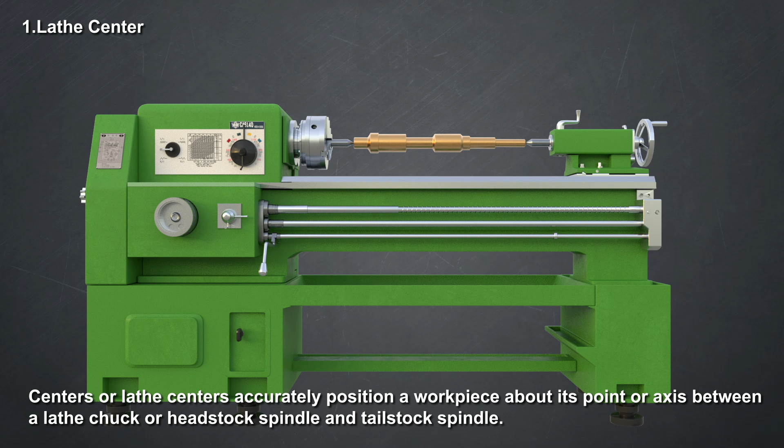Lathe center. Centers or lathe centers accurately position a workpiece about its point or axis between a lathe chuck or headstock spindle and tailstock spindle. This enables the workpiece to rotate or revolve and helps ensure concentric work.

The work turned is parallel throughout, but it requires great skill to perform operations, especially knurling, thread cutting, and undercutting. It is limited to external operations only.

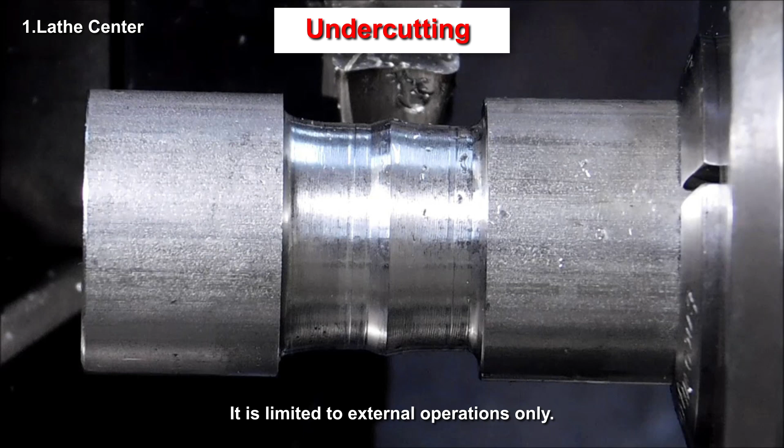Procedure to support work using lathe center. Now let's see how the lathe center supports work. The work needs the following preparations to be carried out before the actual operations are performed.

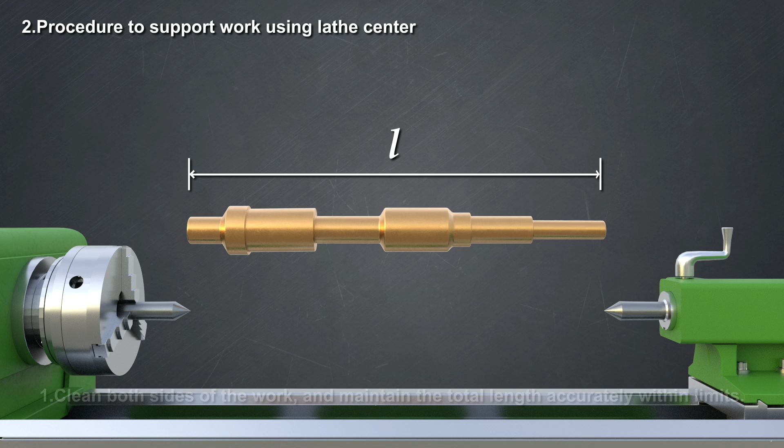1. Clean both sides of the work and maintain the total length accurately within limits. 2. Choose the correct size and type of center drill and do center drilling at both ends. 3. Dismantle the chuck from the spindle nose and assemble the driving plate or catch plate.

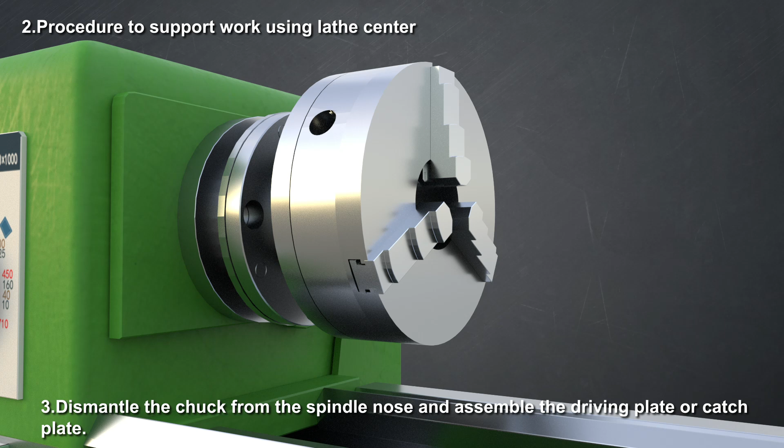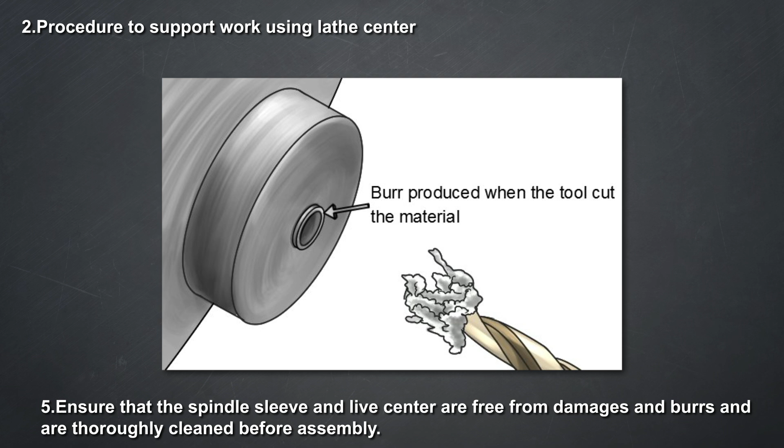4. Assemble the spindle sleeve to the spindle nose and fix the live center to the sleeve. 5. Ensure that the spindle sleeve and live center are free from damages and burrs and are thoroughly cleaned before assembly. 6. Check for the true running of the live center.

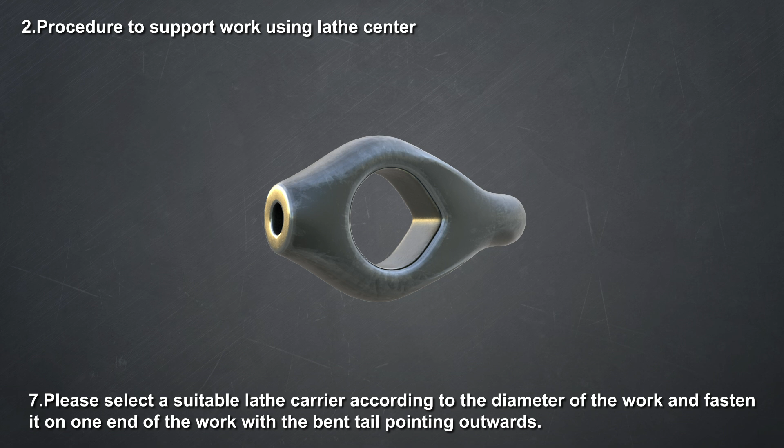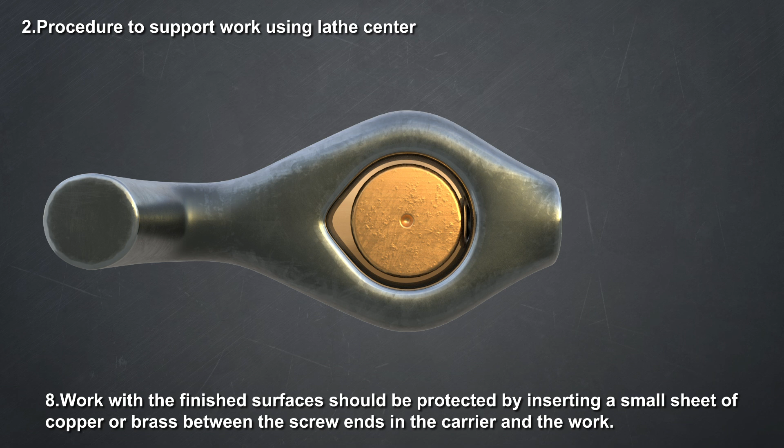7. Select a suitable lathe carrier according to the diameter of the work and fasten it on one end of the work with the bent tail pointing outwards. 8. Work with finished surfaces should be protected by inserting a small sheet of copper or brass between the screw ends in the carrier and the work.

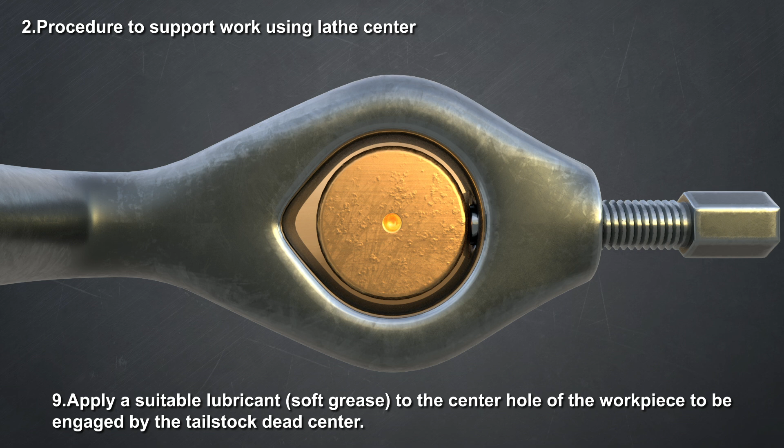9. Apply a suitable lubricant, soft grease, to the center hole of the workpiece to be engaged by the tailstock dead center. 10. Move the tailstock to a position on the bed to suit the length of the workpiece. The tailstock spindle should extend approximately 60 to 100 mm beyond the tailstock.

11. Ensure sufficient space for the saddle to operate before clamping the tailstock to the bed. 12. Clamp the tailstock in position by tightening the tailstock clamp nut.

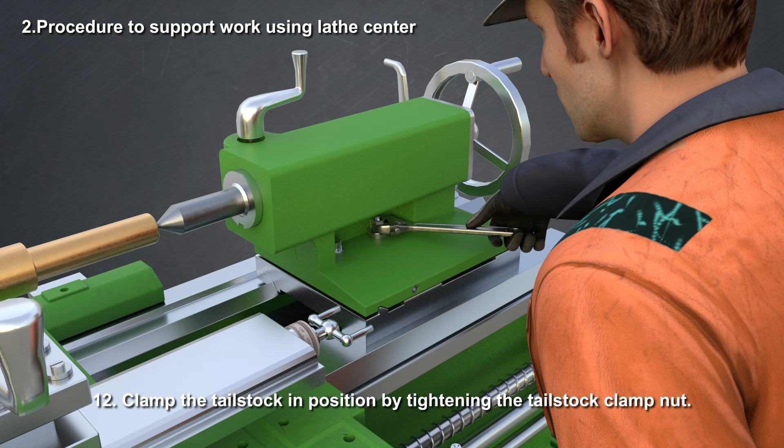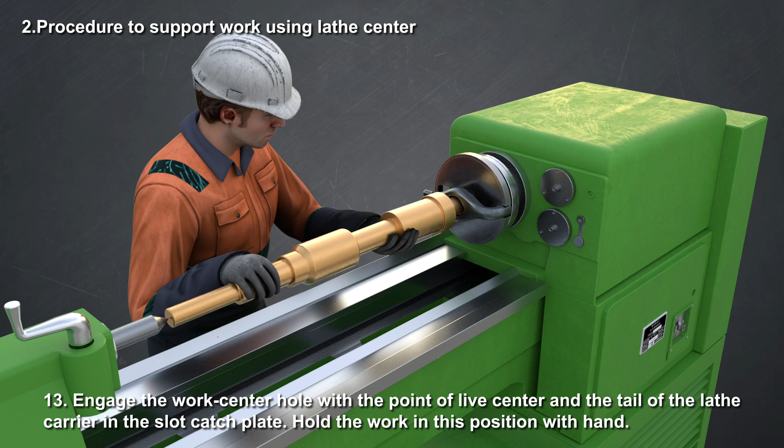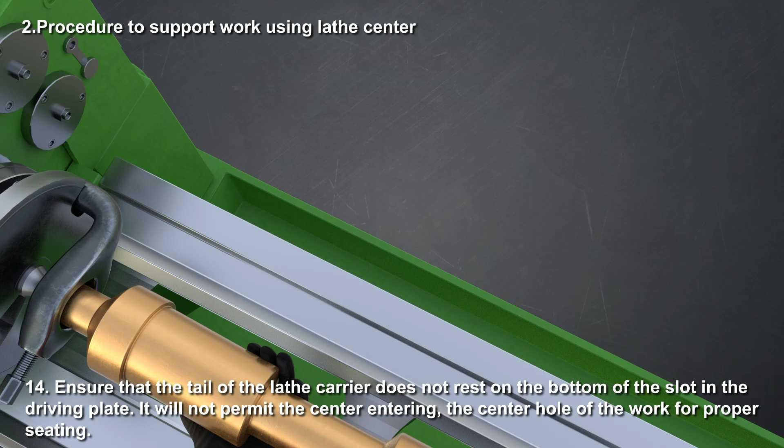13. Engage the work center hole with the point of the live center and the tail of the lathe carrier in the slot catch plate. Hold the work in this position with hand. 14. Ensure that the tail of the lathe carrier does not rest on the bottom of the slot in the driving plate. It will not permit the center entering the center hole of the work for proper seating.

15. Advance the tailstock spindle by the hand wheel rotation until the point of the dead center enters the center hole of the work with proper seating, eliminating all endwise movement.

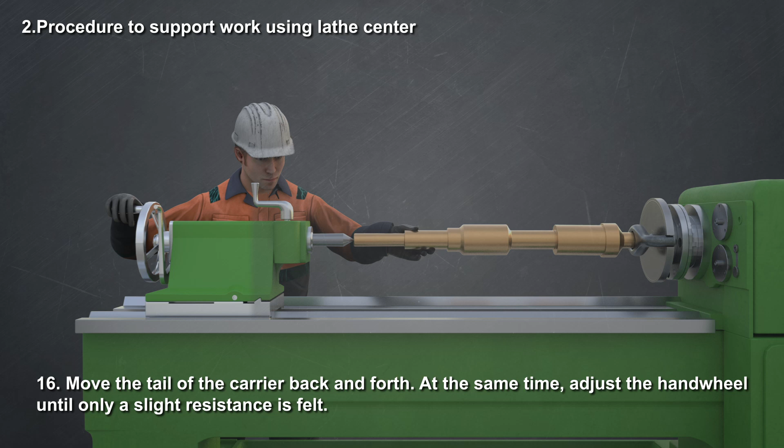16. Move the tail of the carrier back and forth. At the same time, adjust the hand wheel until only a slight resistance is felt. 17. Tighten the tailstock spindle clamp at this position and check that the resistance does not change. Set the machine for about 250 rpm and allow the work to run for a few seconds.

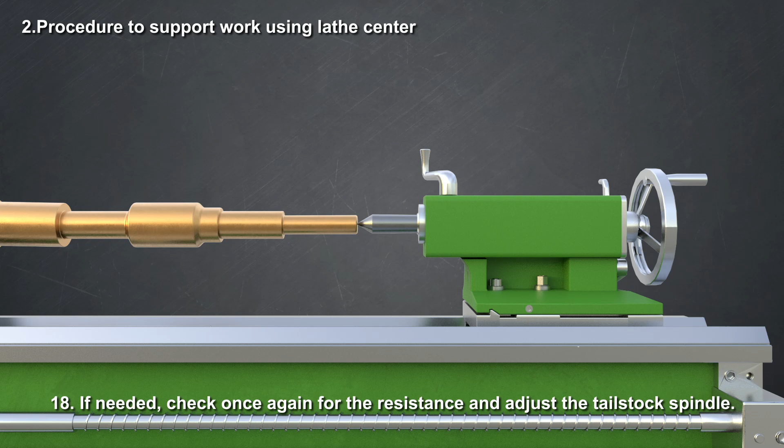18. If needed, check once again for the resistance and adjust the tailstock spindle. 19. Work is now ready for operations.

20. Before holding the work between centers, ensure that the centers are aligned. In this video, we have learned about various work supporting devices used in lathe machine. Thanks.